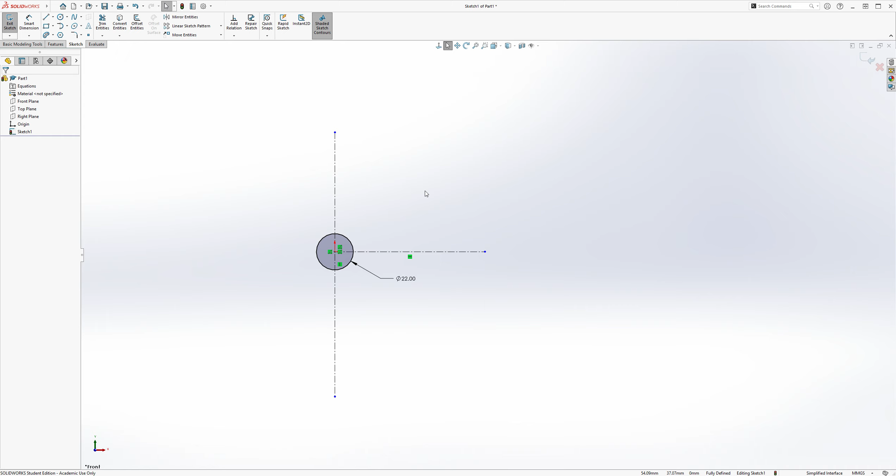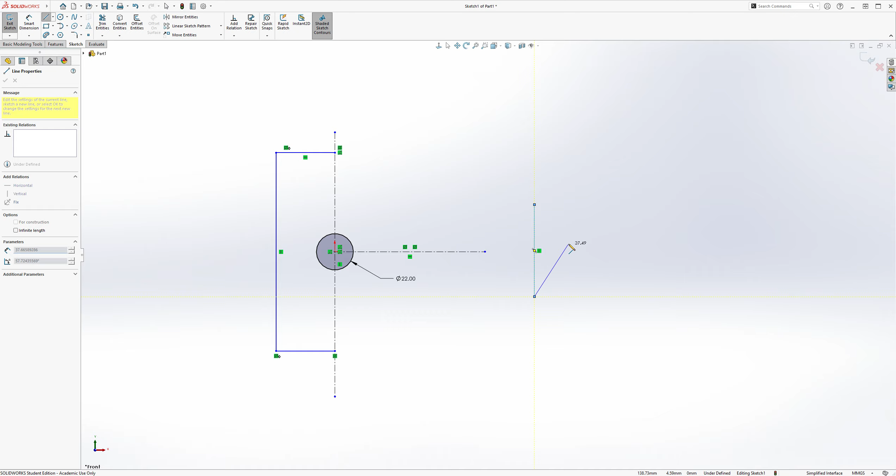So I'm actually going to draw a vertical center line here too, just to have like a barrier. And I'm just going to draw a horizontal line. I'm going to go ahead and mirror that line to the other side. I'm going to close them out with a vertical line like this. And then I'm going to add another line here. And I'm going to make sure its midpoint is coincident with this horizontal center line. So now it's even.

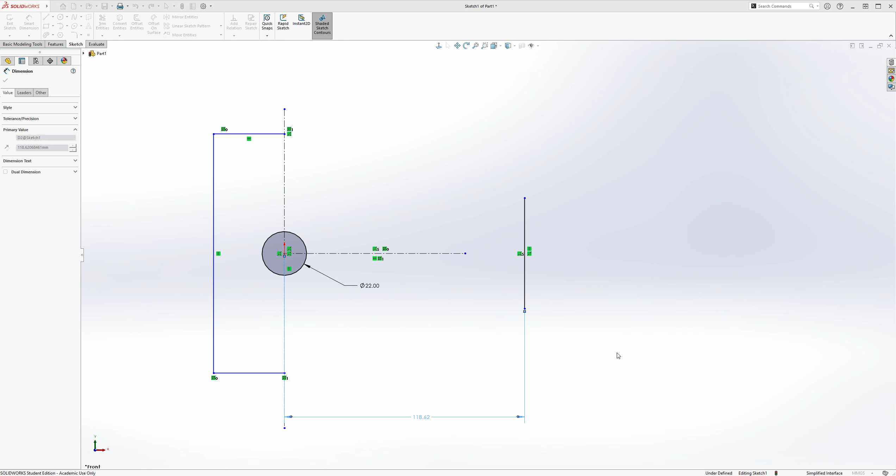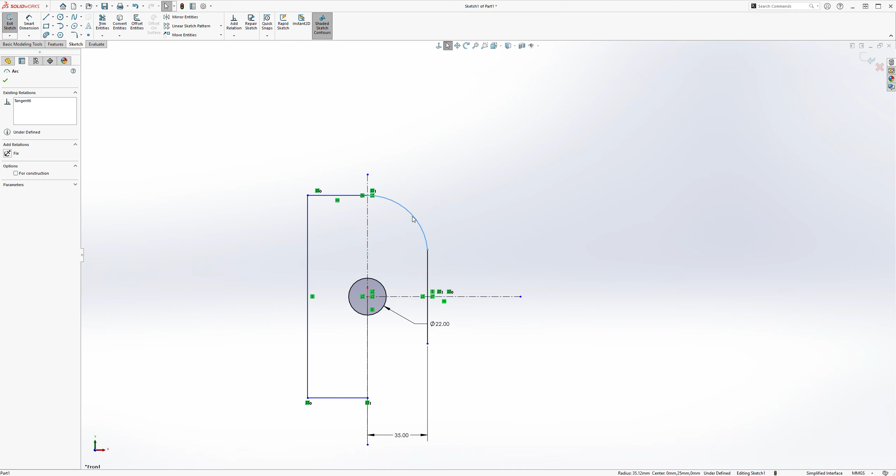And we're going to start dimensioning. So the distance between origin and this line, right side line, is going to be 35. And then we're going to have an arc. So I'm going to go to arc, click tangent arc, because it should be tangent with this horizontal, and then it connects with this point. And the arc's actually not tangent with this line. It's only tangent with this line. So I'm going to go ahead and mirror this to the other side. And then I'm going to make sure that the arc's radius is 44. Like so.

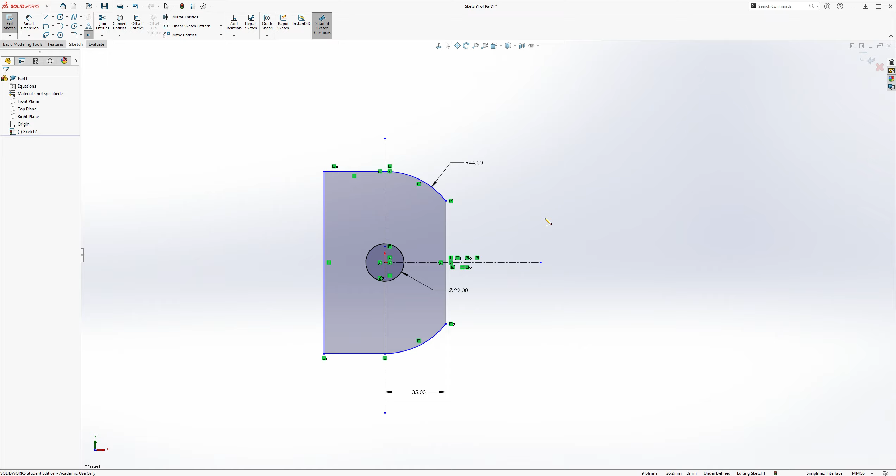And let's make this a little bit thinner. But we're going to fully define this part a little later, and I'll show you when. So for now, we're going to need a point. And what's the purpose of this point? It's to establish the R127 arc, which is going to serve as the outline for our slot on the left side. So we're going to dimension the distance from this point to origin. Its vertical distance is going to be 18. And then its horizontal distance is going to be 12. 12 and 18. So now that point is fixed.

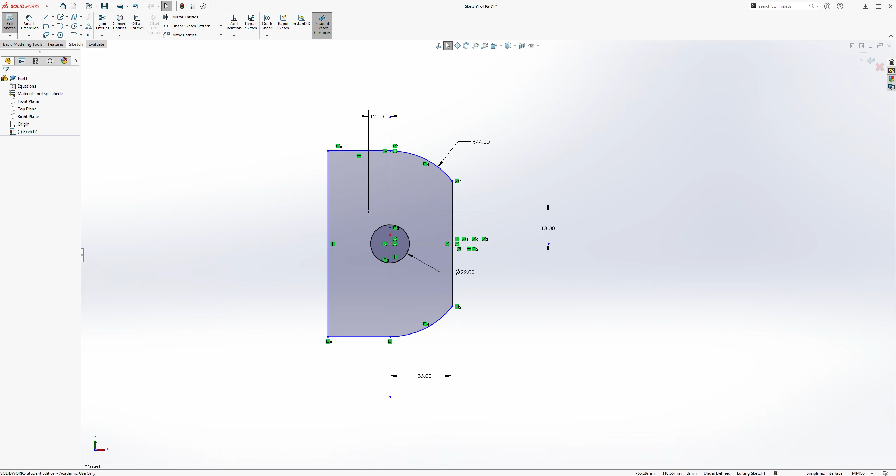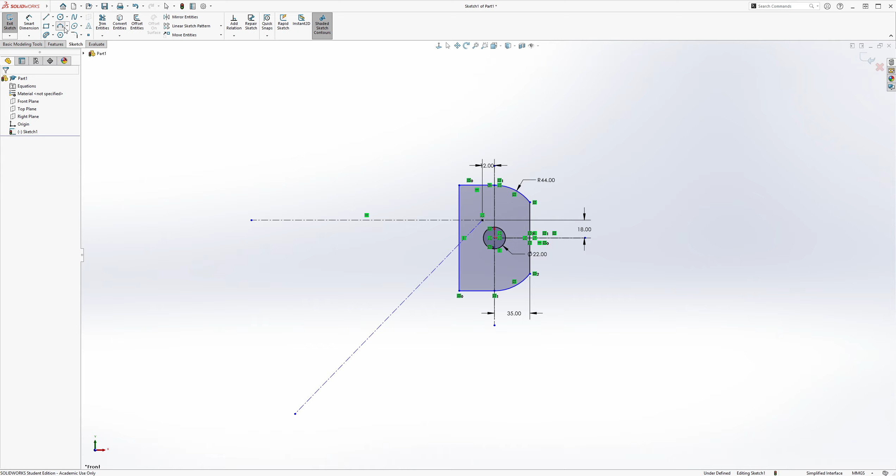So now we can draw two center lines. The first center line is going to be horizontal, like this. And the second center line is going to be diagonal, but we're not going to define it yet. And then, like I said before, the arc, we're going to use a center point arc. So I'm going to select the point as a center point. I'm just going to draw an arbitrary arc like this. And now I'll dimension the arc as being 127. So now you have two intersections, and we'll use those two intersections to build our slot.

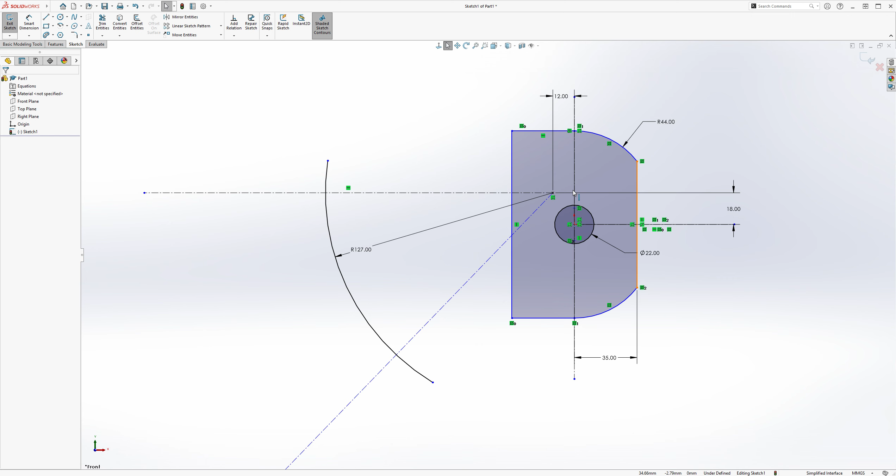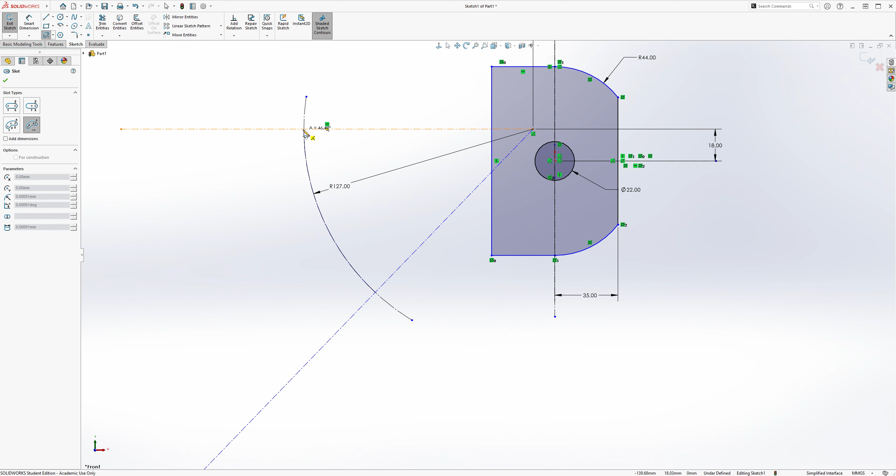So first of all, I'm going to make this arc that we just created construction because we're not actually using it. And then we're going to click slot, and then we're going to click center point arc slot. So our first point will be the center point, which is going to be here. And then I'm going to select the intersection and then the next intersection, like this. And then we're going to create our arc. And now I'm going to offset this arc by a distance of 7. And then I'm going to dimension the arc from the offset slot as being 23.

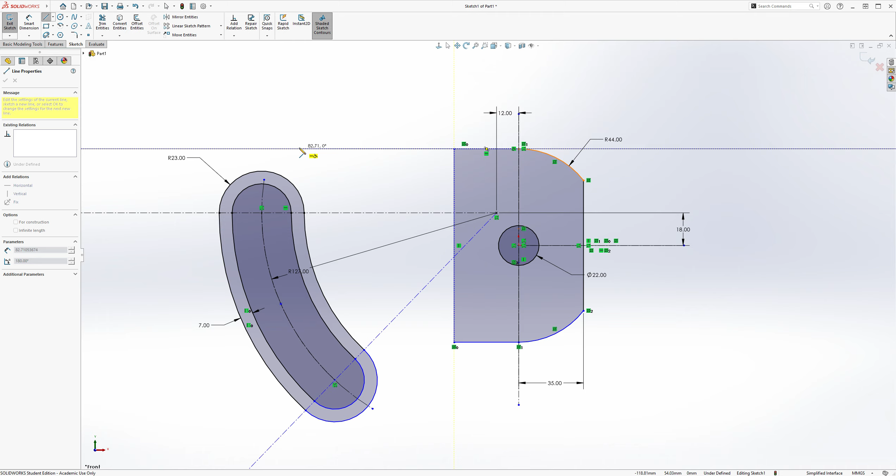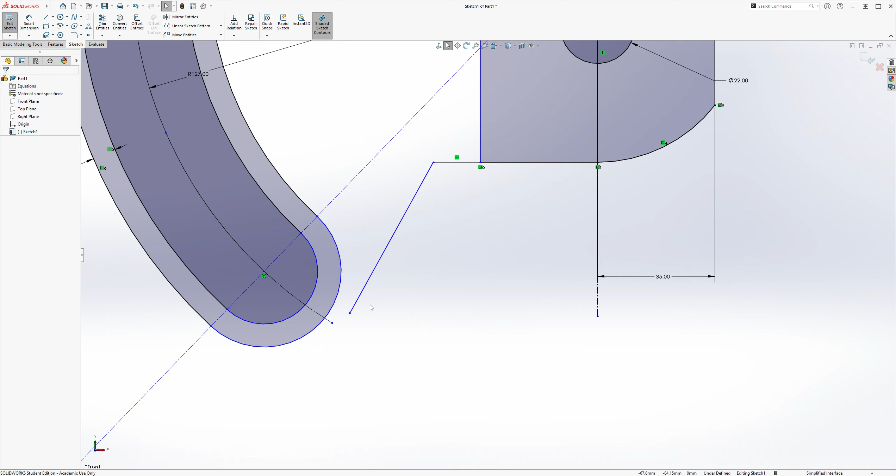And I'm going to have a horizontal line like so. And I'm going to make sure that this horizontal line is tangent with the outer slot, and its endpoint coincident with this arc. Now for this bottom part, I'm going to draw a horizontal line, a diagonal line, and I'm going to make it tangent. Oh, actually, hold on. Let me delete that. Going to make a diagonal line, and let's make this point coincident with the arc. Let's actually add a tangent relation as well.

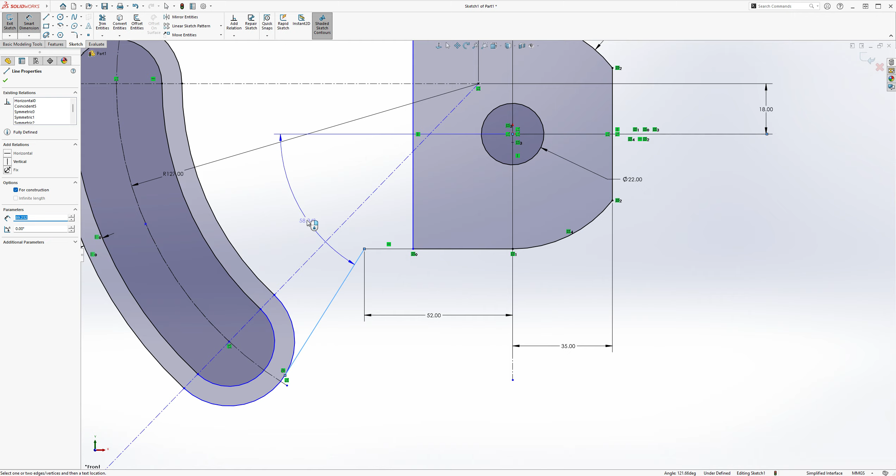And then we're going to focus on this corner point right here. So the horizontal distance from this corner point to the origin is going to be 52. And then the angle between this diagonal and this horizontal construction line we created earlier is going to be 45 degrees. And notice that when I establish the angle of this line, the diagonal center line we created earlier that we never defined, it followed as well. And the only reason this follows is because of this tangent relation at the bottom.

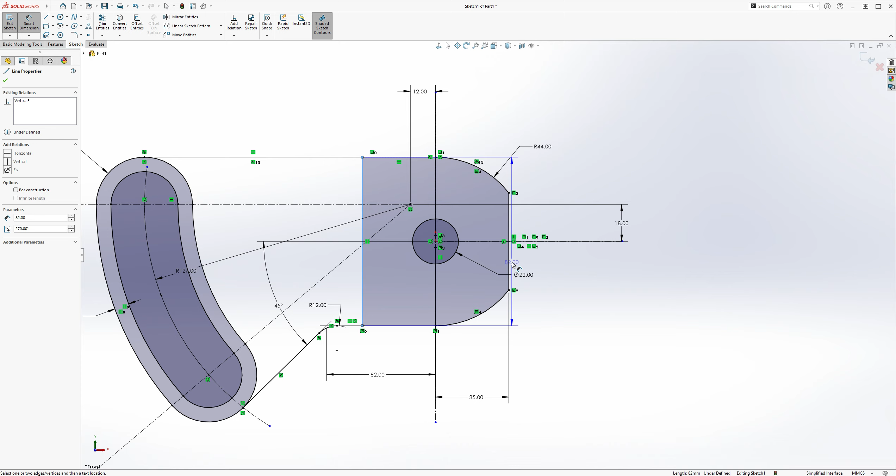And then I'm going to add a fillet, an R12 fillet to that corner we were just working on. So this corner, R12 fillet. Select OK. And then finally, if you look at the top view from the engineering drawing, you'll see that the distance between these two lines for the right side extrusion is going to be a total of 67. So now everything is fully defined. But we're not done. We obviously still have the middle cut to do.

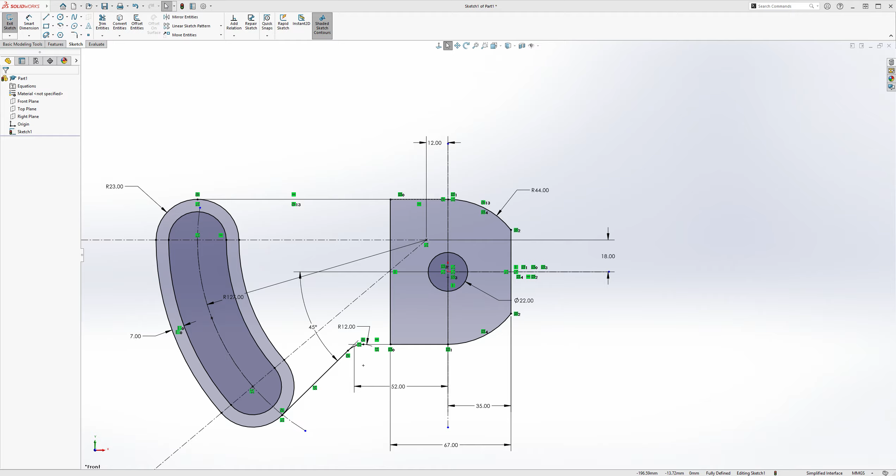Yes, candy corn. So that candy corn shape, its distance from this diagonal and the distance from this horizontal is the same, 17. So I think we're going to have to use offset entities. I'm going to click this line, and reverse the offset to make sure the distance is 17. We'll select OK, and do the same thing for the opposite side, offsetting this diagonal line.

Well, I kind of only want the diagonal. Let me see, offsets. I guess we'll just keep it like that. Actually, you know what? I'd rather not use offset. I'd rather just delete this and create a parallel line.

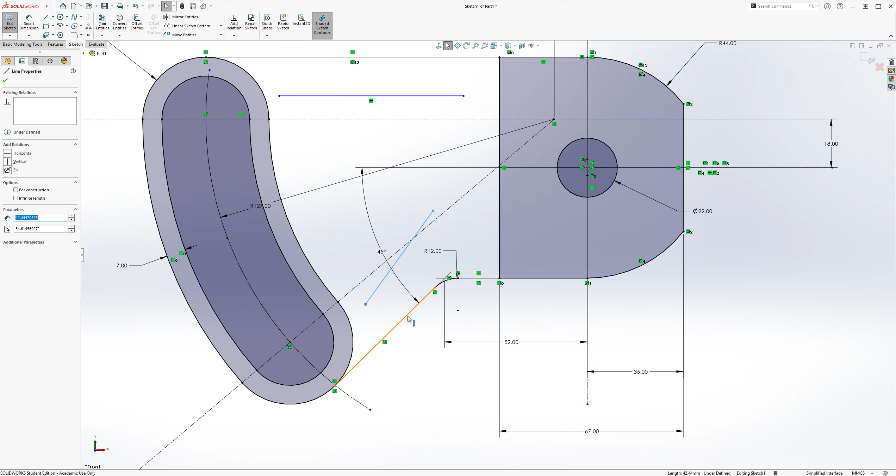So I'm going to create a horizontal line like this, and another line, a diagonal line like this. I'm going to make sure this diagonal line is parallel with this one. So parallel. And let's make their distances between the edges be 17, and I'll follow with the other side as well, 17.

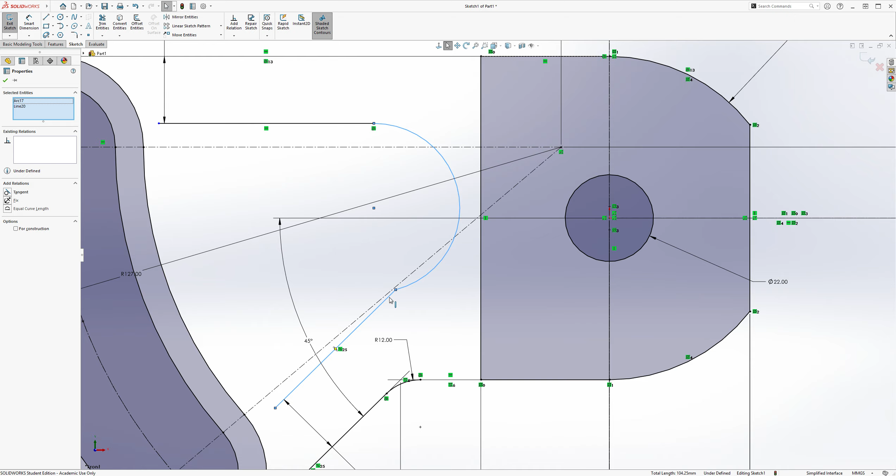And then I'm going to connect these two endpoints of the lines with an arc. It's going to be a tangent arc, I believe. It's going to be tangent with both lines, so I'm going to make a tangent arc connecting both lines. But then I'm going to make it tangent to the other line, and add a radius of 25 to it.

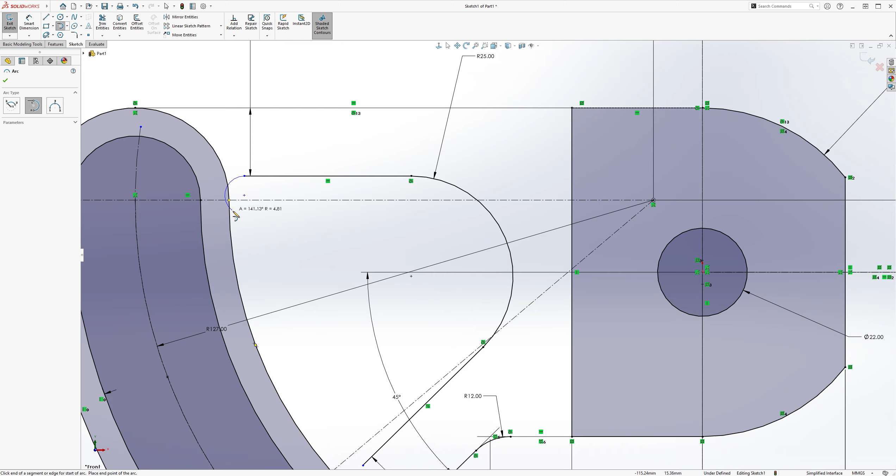And then finally, we're going to add some more tangent arcs that are going to be coincident with the slots. I'm going to add it on the other side as well, coincident with the slots. And let's make sure those arcs are tangent with the edge of the slots. Tangent. And tangent. So now you got your candy corn cut.

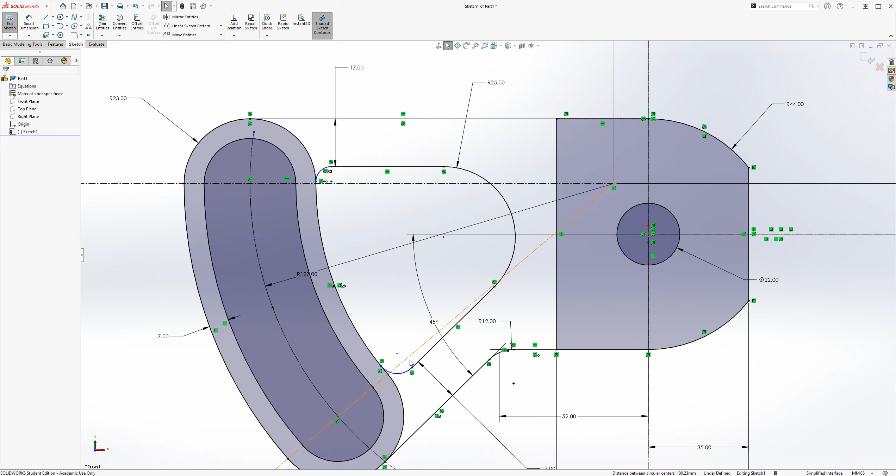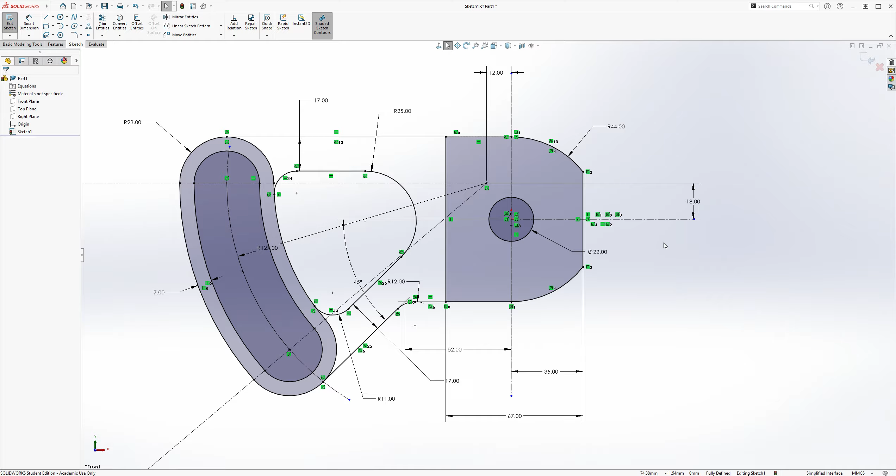And these two arcs are equal, so I'm going to give the equal constraint, and just dimension one of them. So this arc right here, bottom corner, is going to be R11. So now you have your fully defined candy corn cut, and yeah, everything is defined. I believe that's it. Yes, that is it. Okay, so it looks very messy, but it is fully defined.

So we can start our extrusions. I'm going to go to Features, Extrude Boss Base, and there are 3 different extrusion depths. I believe everything is going to be mid-plane extruded. So let's change it from blind to mid-plane, and then let's do 18.

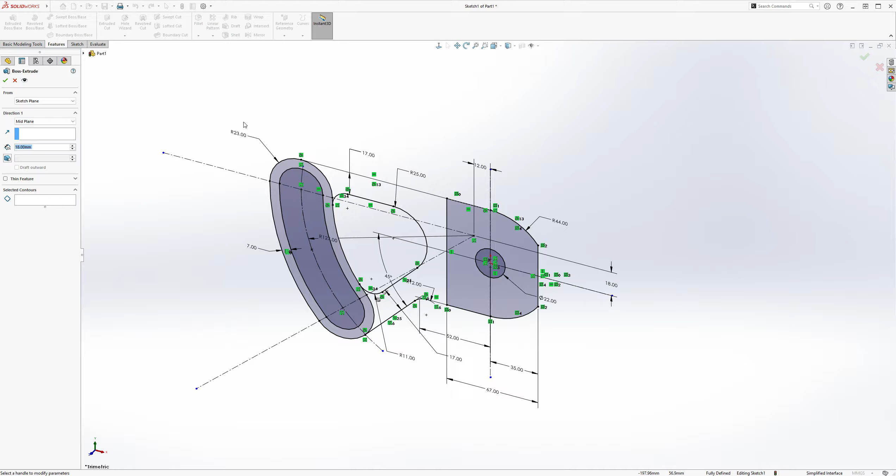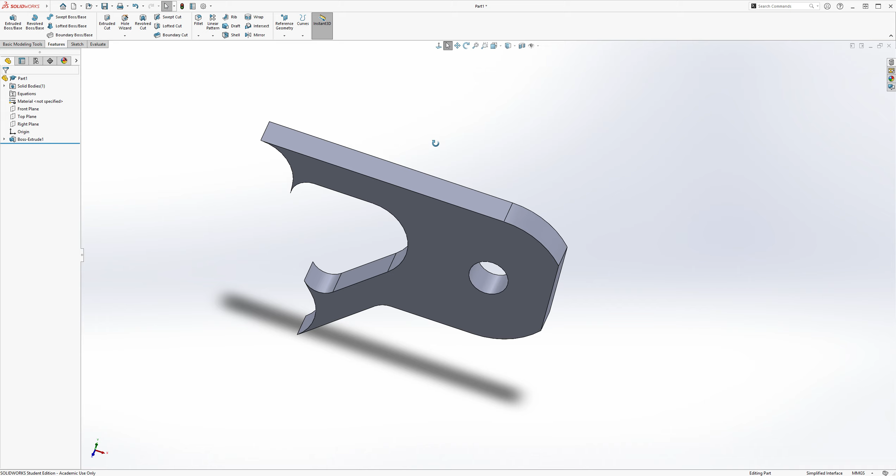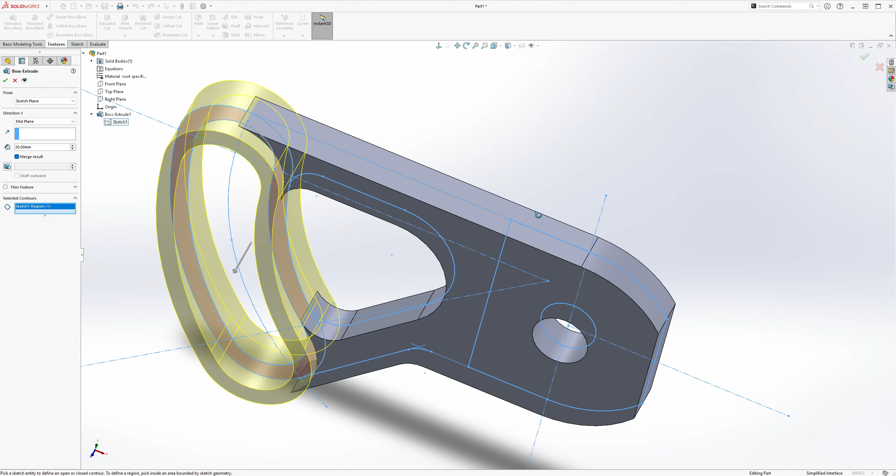I'm going to select contours, this contour and this contour. Those will be 18 to start. We'll select OK, and then we'll extrude the other end, Extrude Boss Base, the same sketch, and this time change the value to 20 from 18, with the selected contour being the slot. That should be 20, mid-plane extrude. Select OK.

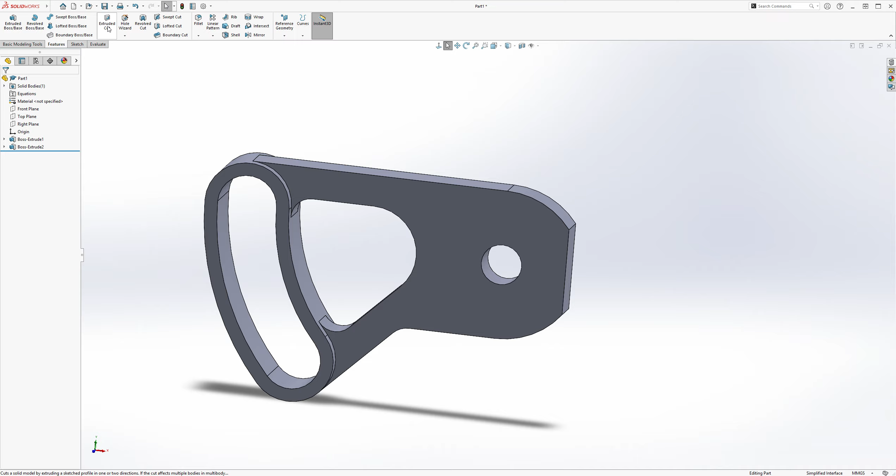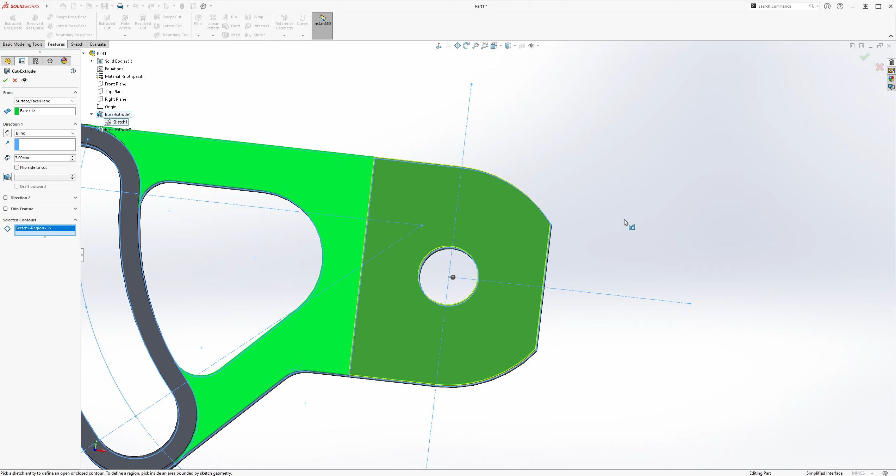Now we need to create a cut for the right side extrusion, a cut of depth 7 from the top plane. I'm going to click Extruded Cut, select the same sketch, do a blind extrusion of depth 7, not from the sketch plane but from a surface, this front surface, and the selected contour will be the right side. So it should cut 7 deep from the top surface, and we will select OK.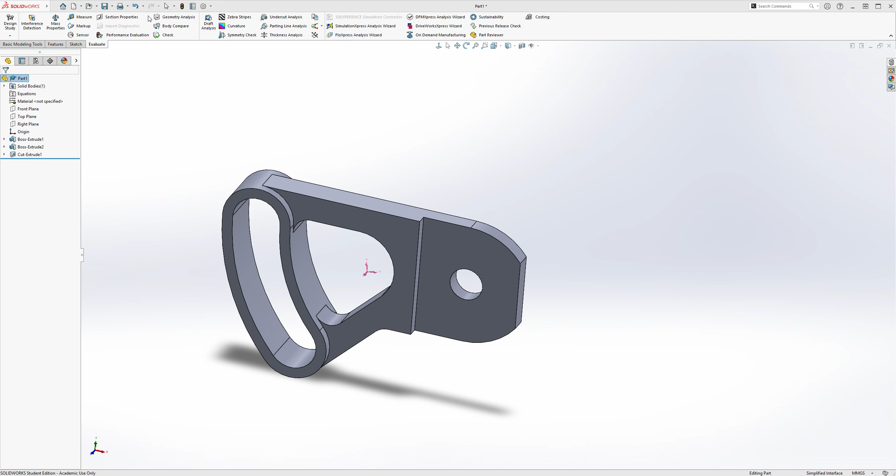And that should be your full completed part. So I'm going to check the answer, evaluate mass properties. For my volume, I ended up getting 181,858 cubic millimeters for my volume. So I hope you learned something from this video, and I'll see you in the next one.